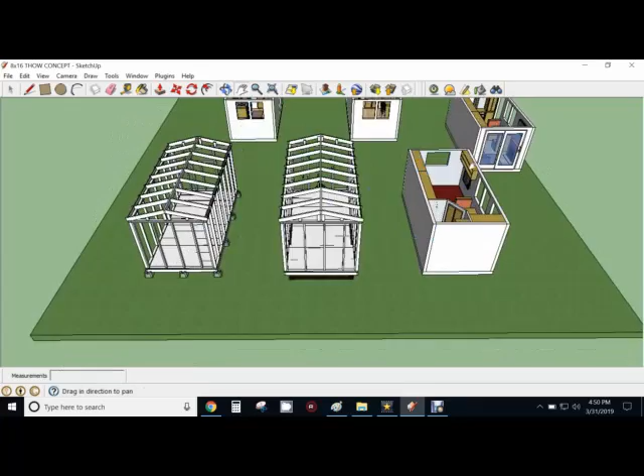This is part 2 of my series on how to build an 8x16 tiny house on wheels or freestanding tiny house. And if you watched the first lesson, which I highly recommend, what you did is you got to see all the different ways that an 8x16 can be used. And I showed you these 4 different floor plans. And you can choose from any one of those 4 plans or come up with your own.

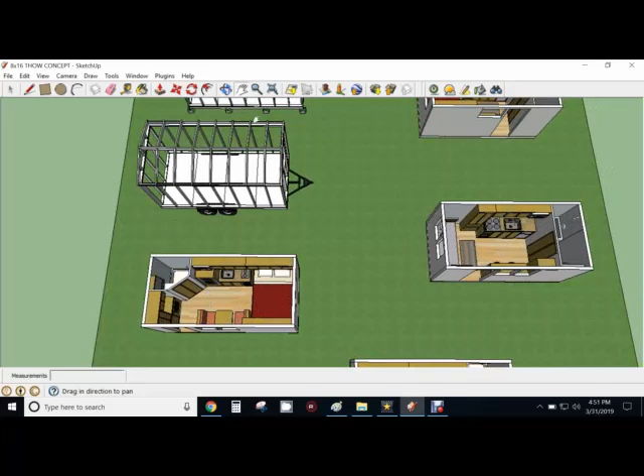All of those units are completely modifiable. Just by clicking on them, you can select and move and erase and do whatever you want. Move windows, move doors, move components in any one of those 4 designs, or come up with your own design if you want. Any of those 4 floor plans can work just fine in this 8x16 tiny house on wheels or freestanding house.

And what I'm going to show you now is I'm just going to go through the basics of framing a structure. That way, if you understand how a structure is framed and constructed, then it makes it a lot easier for you to understand how they're built. And this is probably the simplest house I can think of that you could build, because it's all just straight cuts. If you can draw a straight line and you can cut a straight line, you can build this house.

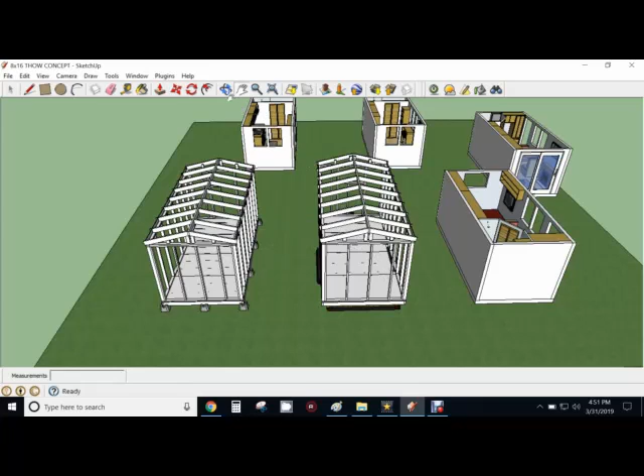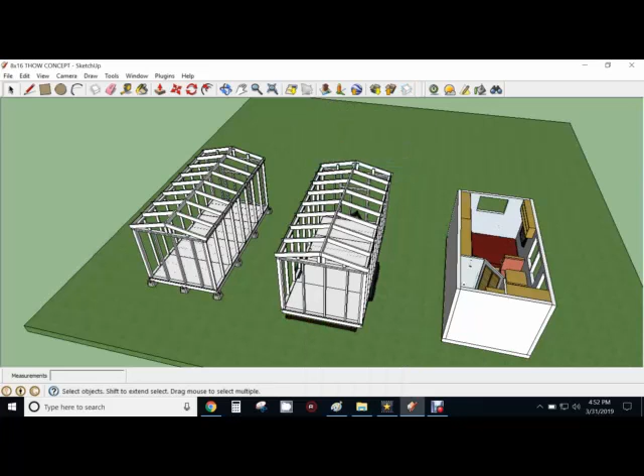So I'm just going to erase these units here because they're kind of distracting. So we'll just get them out of the way. And got some things over here in the way. And I'm just going to erase these so that we have a little easier view of the structure that I'm working on. Okay, so now I've got those erased.

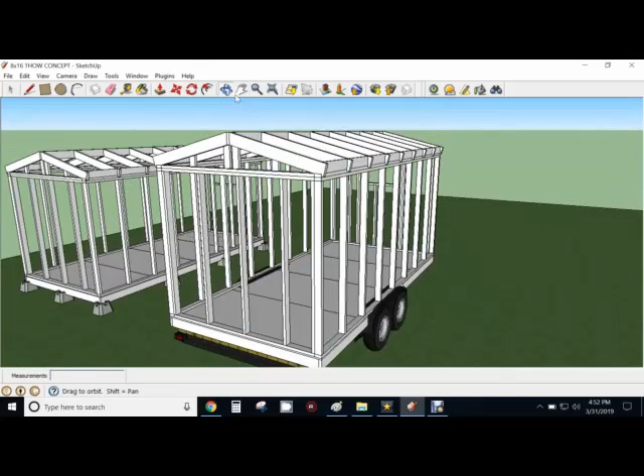Now, what I've got here is an 8x16, and I show this is either freestanding or built on a trailer. Now, the trailer that I'm using is a 7x16, what they generally refer to as a car hauler. And you can get these, Big Tex and a lot of different businesses make these 8x16 or 7x16 trailers. The trailer is 7x16, the house is 8x16. And this is a dual wheel trailer. Generally, they can handle up to about 5,000 pounds axle weight, which is enough for a house this size. It will handle that much weight easy.

And these trailers you can pick them up new for right around $3,500. However, I see them come on eBay and Craigslist all the time for about $2,500 for a good used one. So you might want to shop there before you go pick you up a new one.

Now, I show this is an 8x16, 2x6 floor framing, 2x4 wall framing, 2x6 roof framing. This gives you good insulation in your roof, which is where you lose most of your heat. Would give you R13 insulation if you use batt insulation in the walls, and R19 insulation in the roof. Whether you insulate the floor is up to you. It's not necessary for most houses or most climates, but if you want to insulate it, you can.

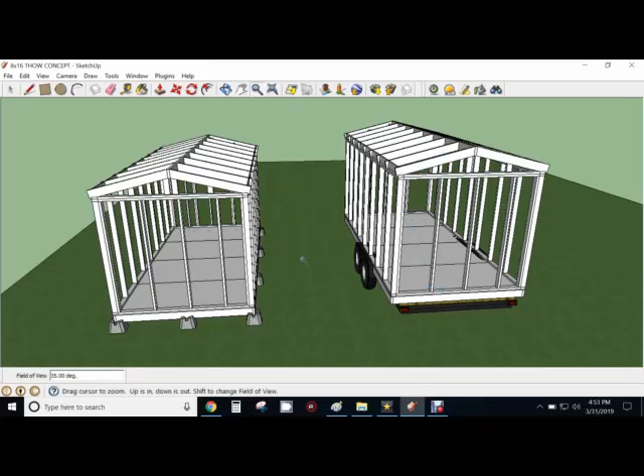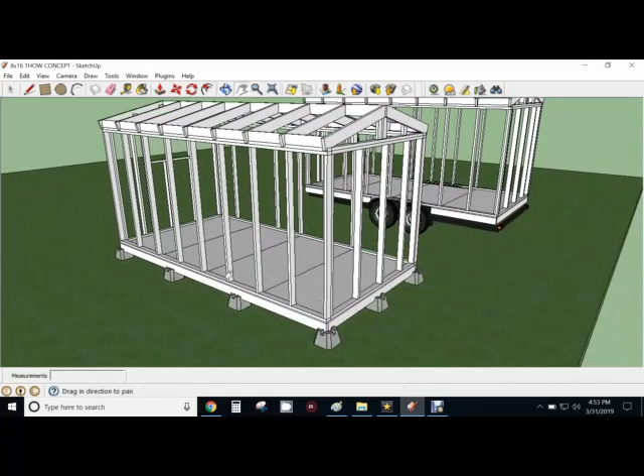Now, I also show this on deck block, which is the same way that I built my cabin. My cabin sits on these deck blocks, and you can pick these up at any home supply store that sells building materials. They run you about $7 a deck block, and you would need 3 rows. I will show this down here. You would need 3 rows of 4 blocks, so you'd need, what's that, 12 blocks, right? So you'd need 12 blocks under your foundation.

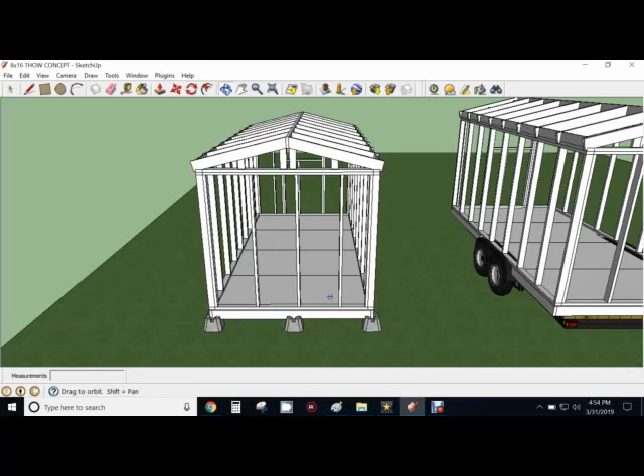And the only thing you need to know really about building this on a freestanding foundation is that the ground needs to be level and clear, so that you don't have anything that's going to grow up underneath the house, and the blocks need to be leveled and on firm ground. You don't want any place where it's going to be flooded out, or you don't want it on sand or something like that on soft soil. The ground needs to be firm, and if you do that, these deck blocks are designed to hold a lot of weight. They will hold a structure this size easy.

Now, to get to the basics, first I'm going to erase or hide some of this stuff so I can show you what we did here. The only difference in the House on Wheels version and the freestanding version is the floor framing. So I'm just going to show you that here.

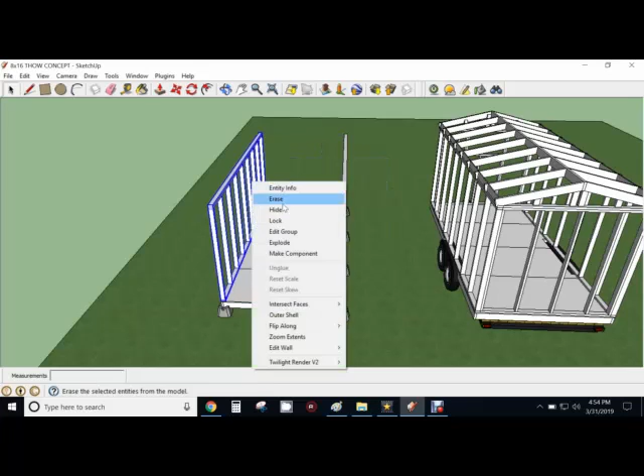Okay, now you can see this as it's set on the deck blocks, and I've just got it set on 12 deck blocks, a row in the middle and a row on 2 sides there. The floor framing on the freestanding structure I've got shown is on 16-inch centers. Okay, this is 2x6 lumber on 16-inch centers. That gives you a good solid floor frame.

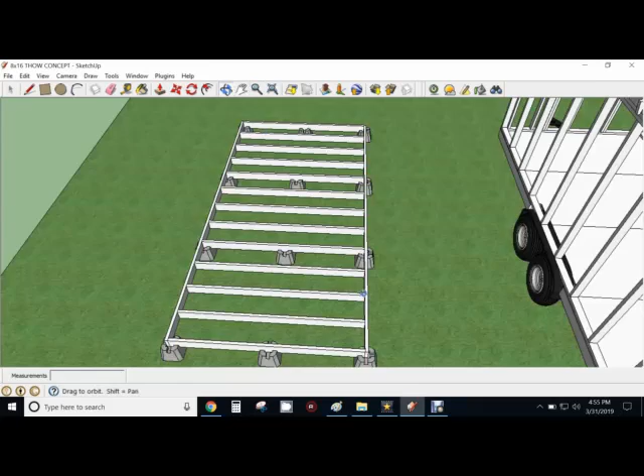All right, now the difference in that and this one over here I'll show you, which I'm going to have to back up here. Excuse me for a second while I just hide these.

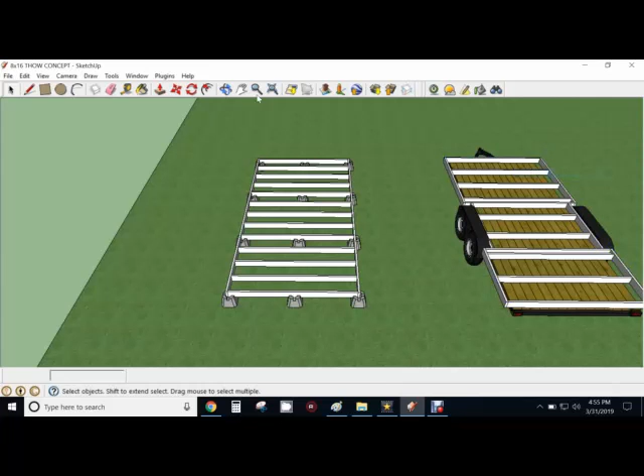Okay, now you can see that trailer, and you can see the difference is, it's still 2x6 lumber, but instead of going with 16-inch centers, I went with 2-foot centers. Because you have a framing structure underneath this that goes all the way around underneath the edges, you don't need as much support as you do with the blocks. However, if you want to go with 16-inch centers, you still can.

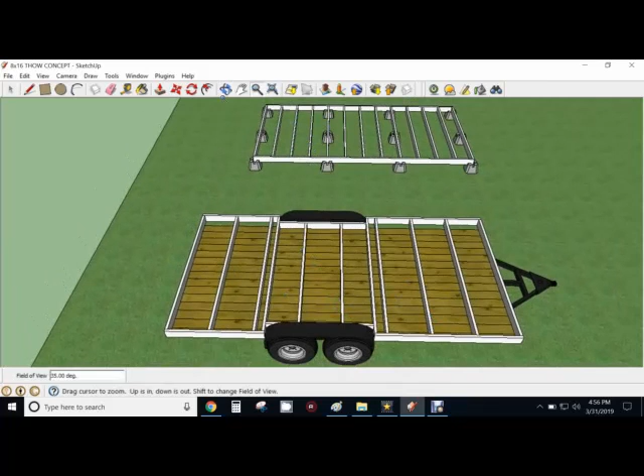The only difference in this house is that you see these indents for the wheel wells. You have to build around the wheel wells. And every trailer is a little bit different in where they situate their wheels. So I can't tell you what the exact dimensions would be for you to build on your trailer because every trailer is a little bit different. But you can see what I've done here is I've just built in around these wheel wells. And your flooring will go inside that.

And then you would have a short box that just goes up and over your fenders, and those would generally be hidden underneath the furniture. You would hide these wheel wells underneath your kitchen cabinets and stuff like that so that they don't stick out in the middle of the room. So you won't even notice that they're there on the inside because they'll be hid underneath a counter or a cabinet. And you can do these on 16-inch centers.

I show this on 2-foot centers because that reduces some of the weight. On a trailer, we're trying to keep the weight down as much as possible. On the freestanding, it's not an issue. But on the trailer, weight is a big thing.

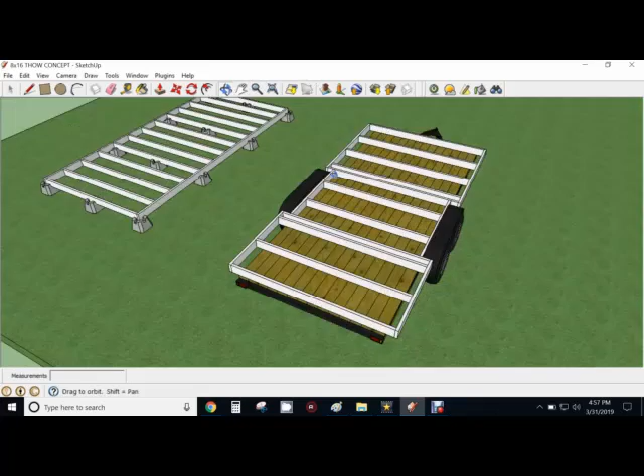Now, I show this on a trailer that already has the wood slats built in. You don't have to have the wood slats if you just have the steel frame. It'll still work. The wood slats just come on them, so why remove them, because they give you more stability on your trailer.

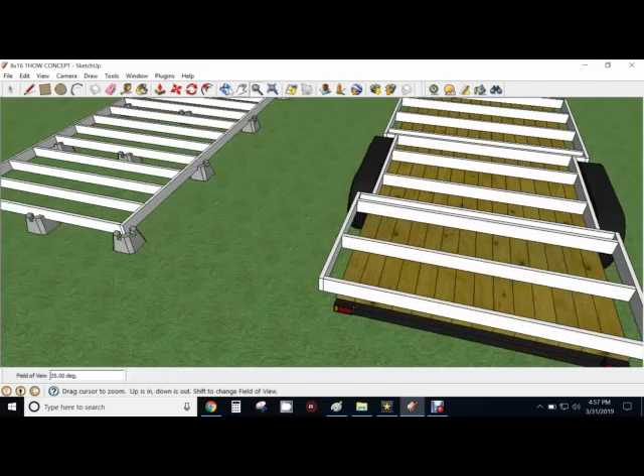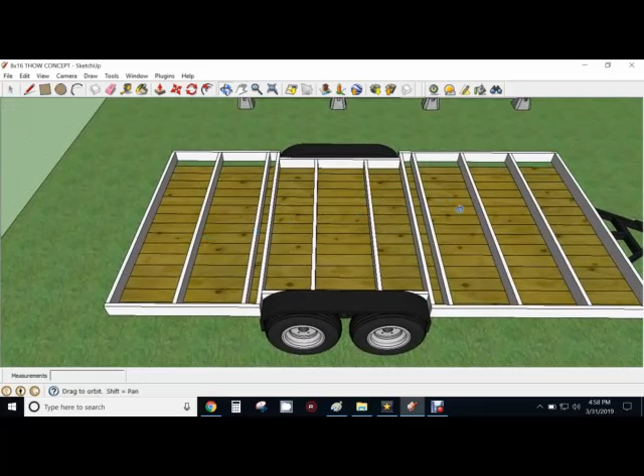And generally, the way these are attached is they usually use lag bolts going through the frame of the trailer and up into the wood, and then they also use steel strapping, and they'll bolt the steel strapping down in several places along this to hold the frame and the house to the structure. If you're not sure how to do that, you can go online or go on YouTube. There's probably half a dozen videos or sources that will show you how to attach your floor framing to your trailer.

Okay, so that's the only difference. Everything else in the way you build these structures is identical. The floor framing is the only thing that is different in these two structures. So now I'm going to unhide these again. Okay, and let's get to the flooring here.

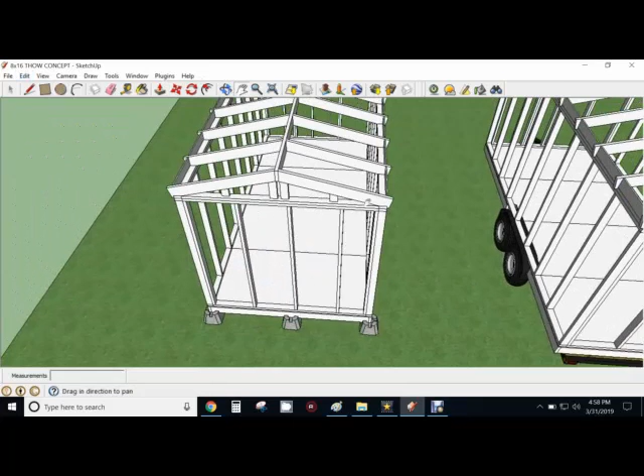Now, I'm going to recommend some materials, but if you choose to use something else, that's just fine as long as it's good, sturdy material. And I always recommend getting recycled materials whenever possible. So this is a good opportunity for you. If you're a scrounger, you can probably find some recycled materials. Okay, so I'm just going to show us now.

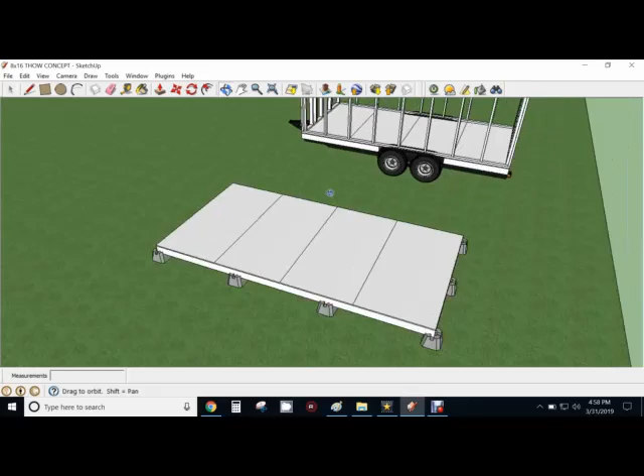For the flooring panels, I recommend OSB 3/4 inch 4x8 sheets, tongue and groove. That gives you a real solid flooring that isn't going to sag, okay? 3/4 inch, good solid flooring. These come in 4x8 sheets, so since this is an 8x16 foot trailer, you need 4 sheets, and you won't even have to cut them.

And when you put them down there, make sure that you square your corners and level everything, okay? If you square all your corners to your first panel, then the rest of the frame will be square. So that's just the easy way to do it. Put down your first panel, screw it in place, and square your corners. And what square means is it's aligned with all of the edges and the corners.

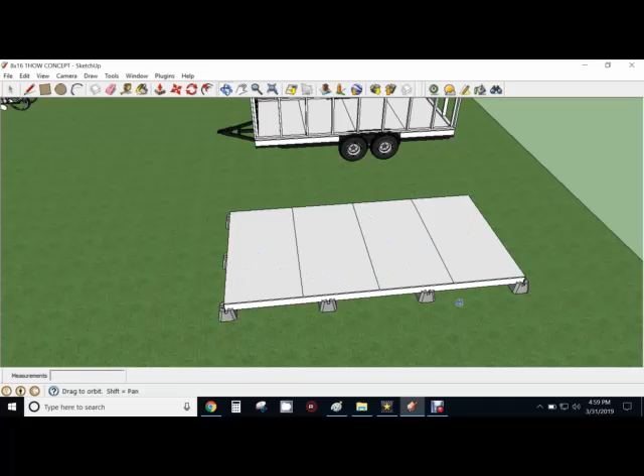If you do that, and then level the entire floor with the ground after it's done, then you'll have a good solid structure. So there's your floor panels. Now we're going to go to the wall panels.

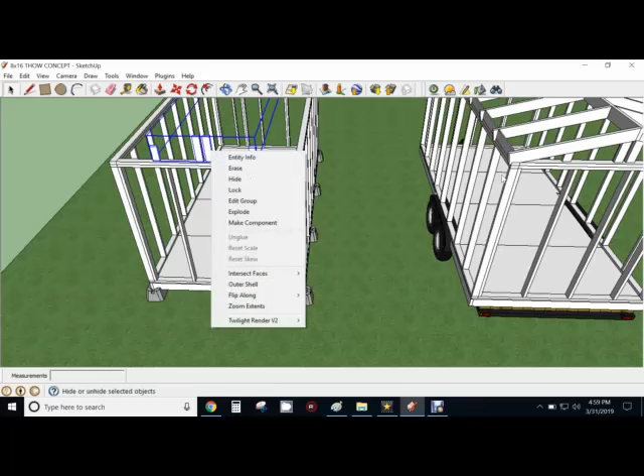And here what I'm doing is I've just got some 2x4, and I built these with 7-foot walls. If you want to go with 8-foot walls, you can go with 8-foot walls. I went with 7-foot walls because on a trailer we're trying to reduce the weight, and that also reduces the drag, and I'll explain that here in a minute. We're going to reduce the weight and the drag on a trailer. And the way you can do that is by going with a 7-foot wall instead of an 8-foot wall.

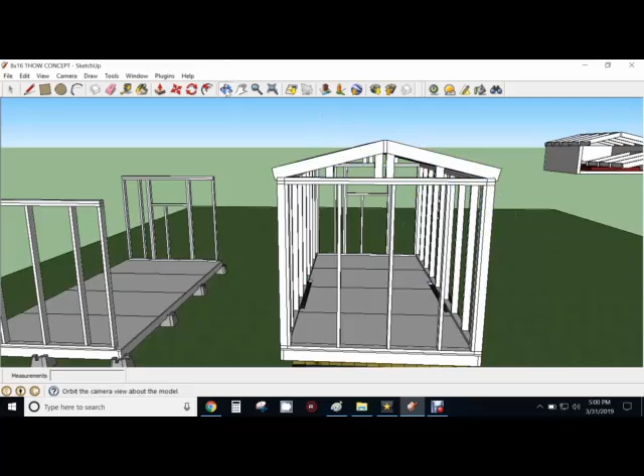In the peak up here, because this does not have a traditional ceiling going across it, in the peak it's over 8 foot. Okay, so you've still got inside room, headroom is generally 8 foot. Nobody stands right next to the wall. So 7-foot sidewalls, you're reducing a lot of weight by cutting it down to 7 feet, and you're reducing drag.

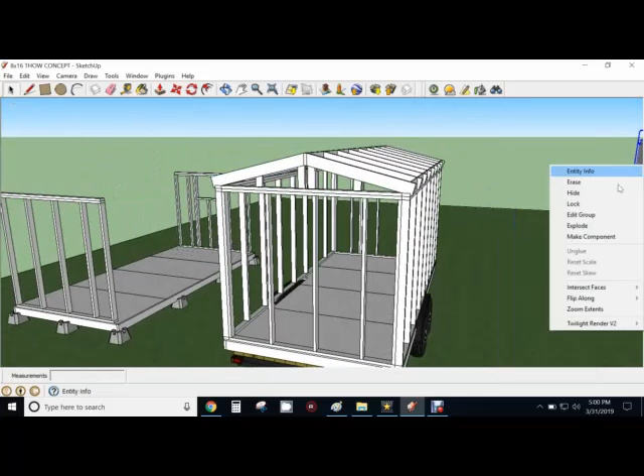If you go up 8 feet, you put this up higher, that means it's going to be top heavy. It's going to be more likely to sway back and forth when you're driving down the road. Dropping it down just that foot makes it less wind resistant and reduces it from being top heavy. Okay? And it reduces a lot of the weight. So you're trying to reduce the weight. I've still got some stuff hanging out here. Let's get rid of this here. Okay. So that's the reason I went with 7-foot walls. If you want to go for it with an 8-foot wall, that's fine.

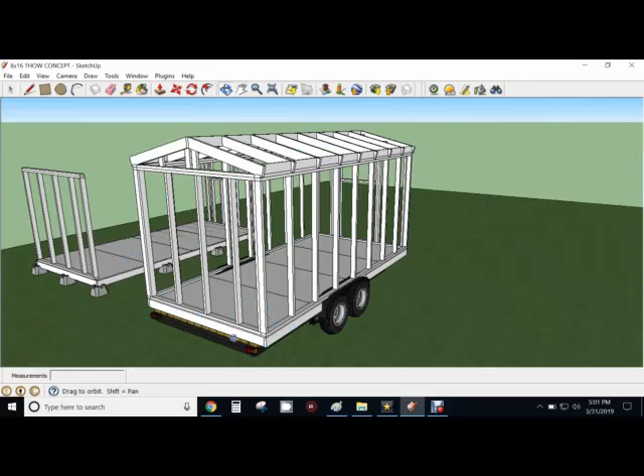What you need to remember on sizes for a trailer is it needs to be less than 13.5 feet high. That's from the ground. 13.5 feet tall, and it needs to be less than 8.5 feet wide. So you want to go 13.5 feet, no more, if you're building up, and 8.5 feet wide is as wide as you can go to be legal on the road. If you're never going to put it on the road, build any damn size you want. But if you're going to put it on the road, then it's got to be under those sizes.

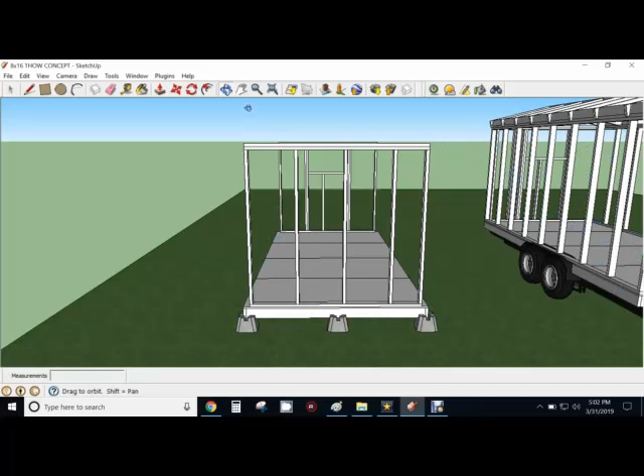Now, on the sidewalls, okay, 2x4 structure, and I put these on 2-foot centers. 2-foot centers, that reduces the amount of wood, so it saves a lot on the cost. If you want to go 16-inch on centers, that's just fine. I don't care. But on the Tiny House on Wheels, I recommend 2-foot centers because that reduces a lot of weight. You're taking quite a few 2x4s out of that situation that would have to be added weight to your trailer.

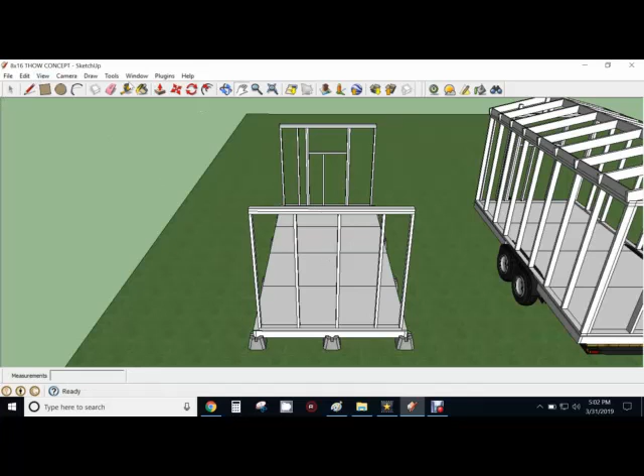So, I show an end wall, okay, with a double header on top of it, single lower floor header, or lower seam board, and these are just screwed or nailed to the floor directly through the floor panels and into the floor framing, okay. Same thing on both walls. Now I show a window here, but your window doesn't have to go there. You can put your window any place you want. Now that's the end walls. We'll unhide this.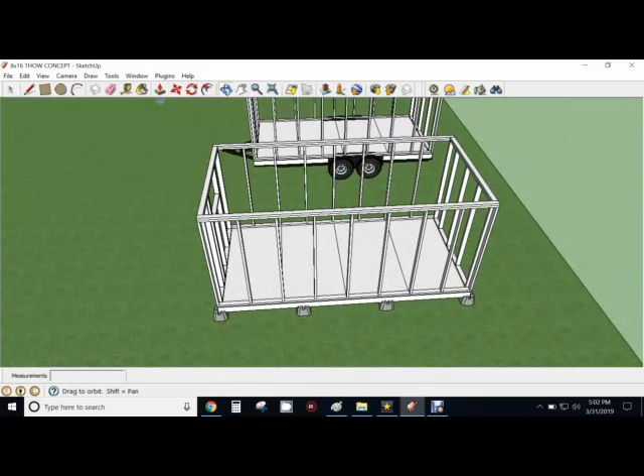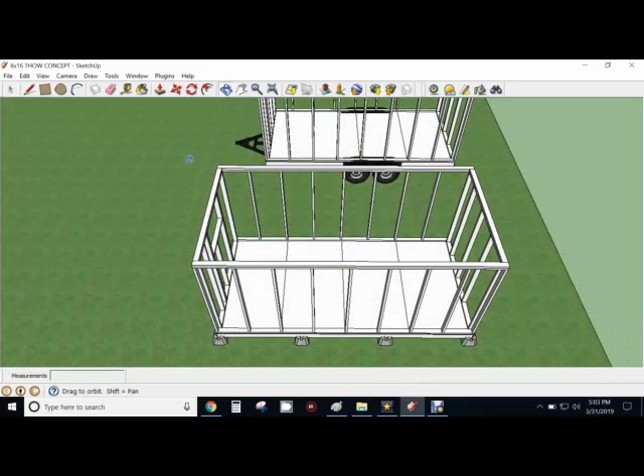Now, here's your side walls. Same thing, 2x4 walls. All right. And on 2-foot centers with a double header and single sill plate. And those are your walls, okay? And I would do California corners on these, but you can do them any way you want. California corners adds one extra 2x4 in the corners just so that you have something to attach your inner wall surfaces to. And that's about it for wall framing, okay?

Now, where you put your doors and windows, that's entirely up to you. Now, if you're doing it on a trailer, like I show this one over here, you could choose from your floor plan that you selected where you want to put your door. So say you want to put your door over here. All you need to do when you have this SketchUp open is click on the wall. And then right click and click where it says edit wall. And then it says add window, add door.

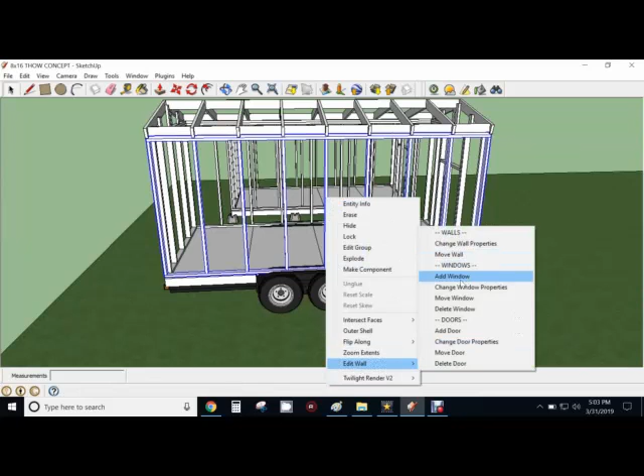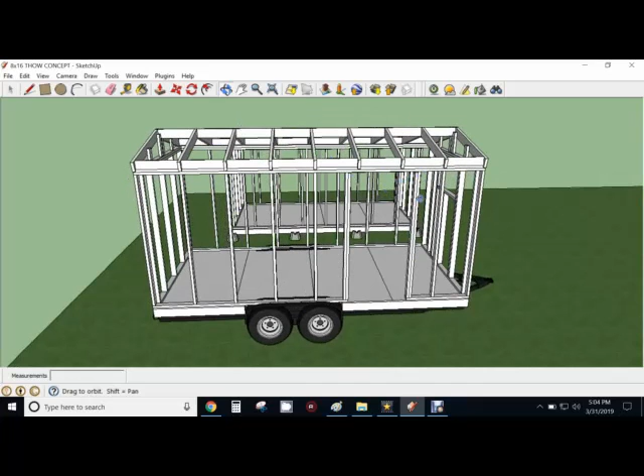Let's go add door right there. And I want a 2x4 header over my door, and I want the door to be 3 foot wide. Yeah, that sounds okay. And then you're just going to select where you want your door. Boom. There, put your door in, okay? Now you can see where you got your door. And it already frames it, puts it exactly where you want it. On a 7-foot wall, it puts it right up next to the header there. So there is your 3-foot door wherever you want it.

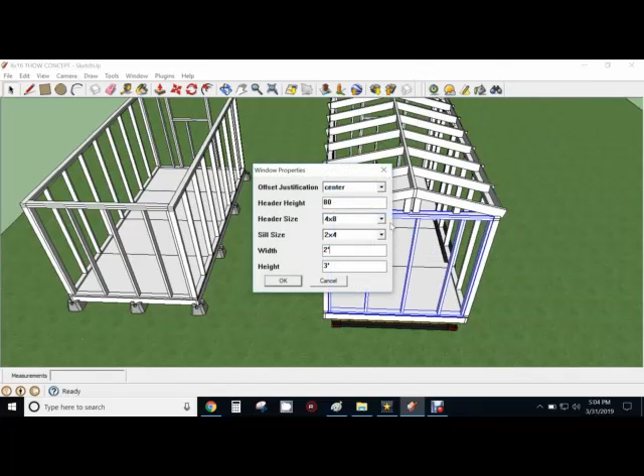Same thing for windows. Say you want a window on this end over here. All you need to do is right click on it, click on edit wall, click add window, okay, and I want a 2x3 window, 2-foot by 3-foot window with a 2x4 header, since I'm working with 2x4 walls, okay, and then I can just take this and I can just center it right there, boom, it puts in my window, okay. That easy. That's how easy it is to modify and change these.

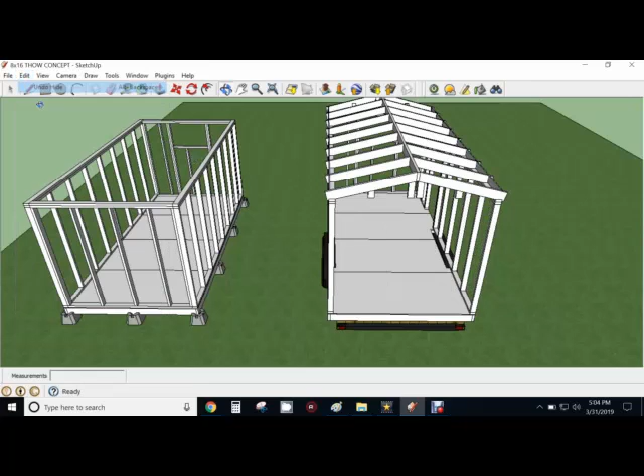If you don't like something, you can go back and change it out. You don't like that? Great. Just go back up to edit and click undo add window, and then click undo hide. And whoops. Undo hide. There you go. And it just puts the wall back in. Say you didn't like that window? Okay. Just put the wall back the way it was. Put a window somewhere else. All right. So that's an easy way for you to modify where you're going to put your doors and your windows in these units, and you can put them anywhere you want.

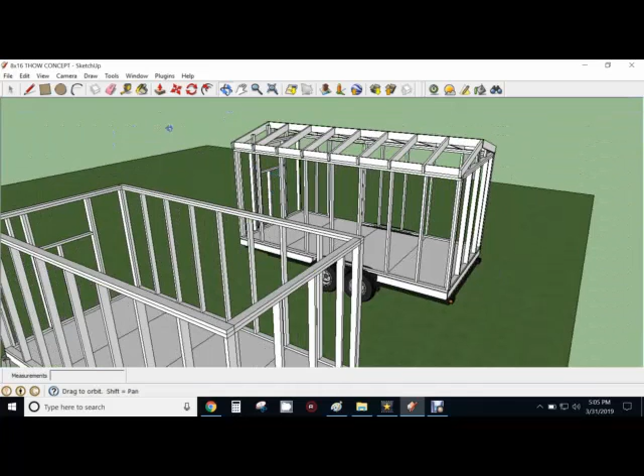Same thing on this unit over here. All you need to do is select where you want it. If I want a door, let's put my door on the end here. Let's put a door and a window on this side here. Just right click, click edit wall, click add door, and I want a 2x4 header, 3-foot door, okay, and let's put the door over here.

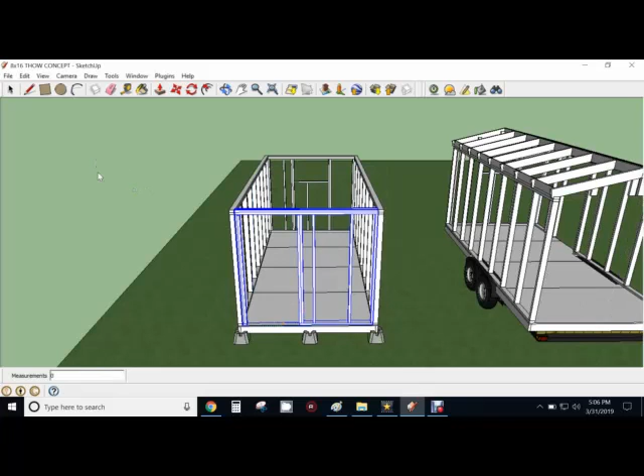I'm going to put the door there, and then I'm going to put a window right in here, okay, right click on it again, edit wall, add window. I'm going to put a 2x3 window in there, and a 2x4 header, okay. Oops, I clicked on the wrong one apparently. Try that again. Edit wall. Add window. There we go. 2 by 3, 2x4. Yeah, okay. And I'm going to put it right there. There it did it. Okay.

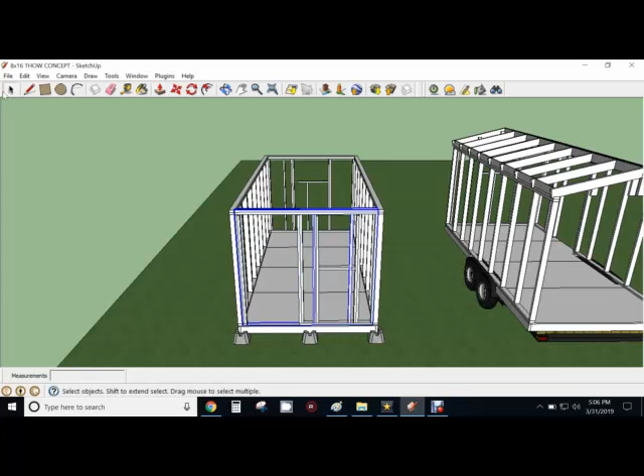Now, sometimes when you put in a window or a door, you have to modify it slightly. So if you want to modify it, double click on it like it's any other component. If I want to take out some 2x4 members or something like that, I can do that. So let's see what we got here. I don't really need an additional 2x4 right here. So I'm going to open this up. Oops, clicked on the wrong one. I'm going to take that 2x4. I'm just going to delete it. Okay. That puts my window where it's supposed to be.

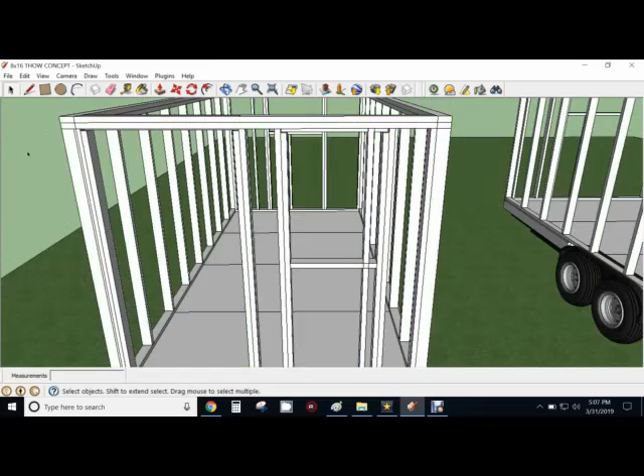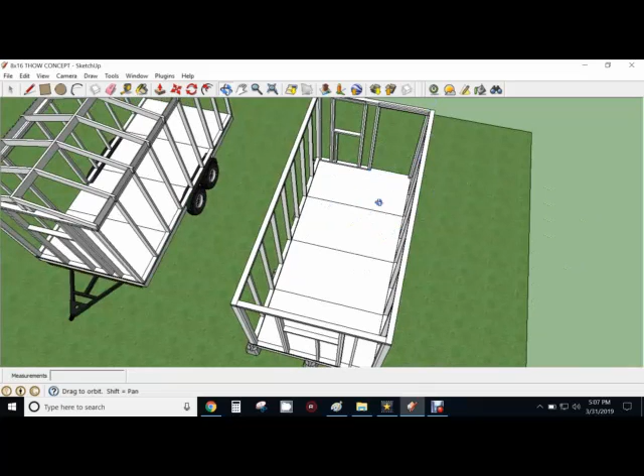Now you can see I've also got a 2x4 here. So we'll just delete that. Okay, now my window looks the way it should. So there I've got a 2x3 window and my door in this end of the house. If I want to modify this so that this is the way I want to enter on this side instead of entering on the side, I can do that, and then I can place all my furniture and everything else in here. So that's how you frame windows and doors, and you can play around with it, decide wherever you want it to be. And let's unhide everything here.

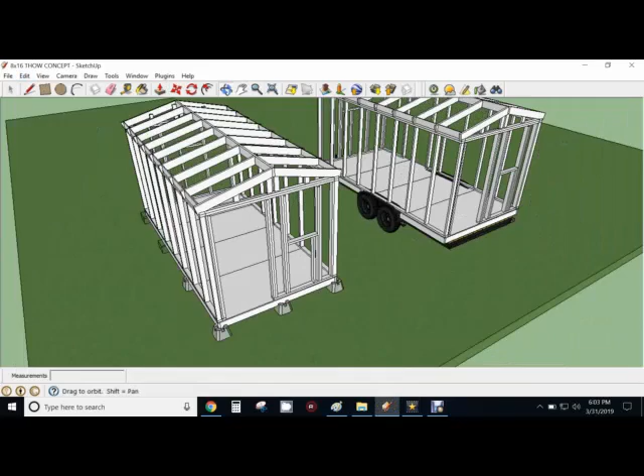Okay, so now I've shown you how to do your floor framing, your wall framing, how to add doors and windows to these units. The only thing left really that I need to show you is just how to design your roof. You can use the roof design that I've showed you here, or if you want a different pitch, you can do a different pitch here. So just to show you, roofs are fairly easy to design.

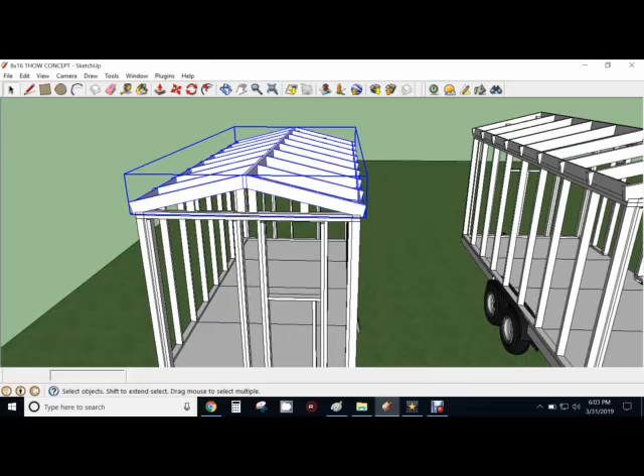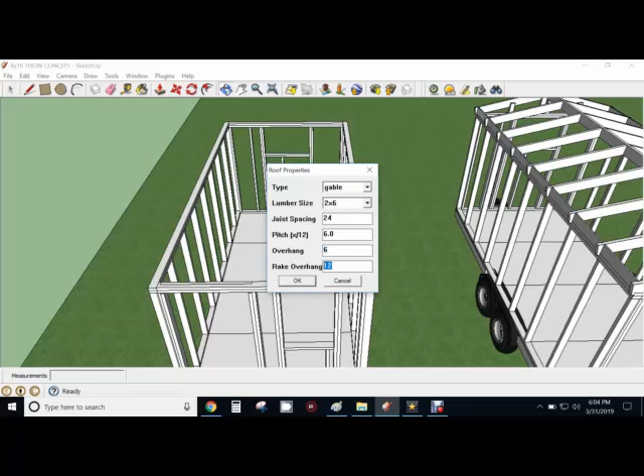What I'm going to do is I'll just erase this roof here, and these boards here I'll just hide. The way you design a roof is in the draw section in the house builder, you'll go to roof tool, and then just select your material. I want 2x6s. We'll go with a 6 pitch. Now remember, on a house on wheels, the end boards have to be under 8'6" for width. On a standalone freestanding house, you can go with any one you want here. So we'll go with a 6-inch overhang and 6-inch rake overhang. And I'll show you what the difference is there.

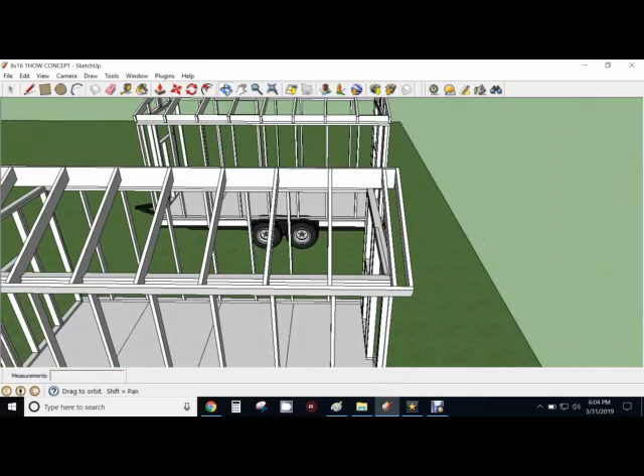Now, there's a 6 pitch. You can see the difference here. With a 6 pitch, you get a little bit more headroom, and your overhang off of the end walls, which I don't do on the house on wheels because you don't want the wind to catch underneath it and rip your roof off. So we go right to the edge with our roof framing for a house on wheels.

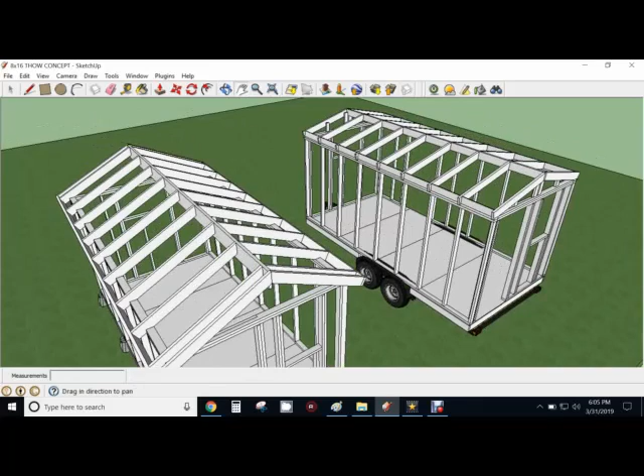You can do a short overhang if you want, but I don't suggest a very big overhang, at least not on that front end, because as you're driving down the road, the wind's going to catch on that front end, and it's going to tend to lift your roof and lift your house right off of your trailer. You could put an overhang on this end, it won't make any difference. So that's a 6 pitch. If you want to change the pitch, then you can adjust your roof and do your end wall plates however you want to do them.

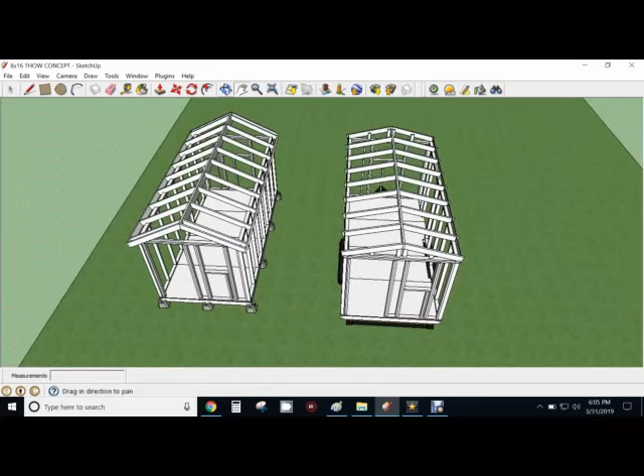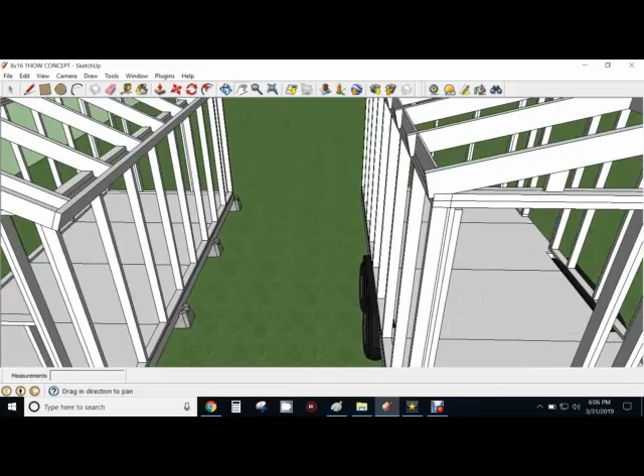Alright folks, I think I've done enough here to show you how to frame and construct one of these. And you've got those 4 basic floor plan models that you can play with any way you want, and that way you can design these, put your doors, windows wherever you want them. You can understand the framing, how the roof is built. You can do any type of detail work you want on these, add all your sidewalls and panels to show what the entire house would look like the way you want it designed. That's why I design these SketchUps like this. I'm not going to do all the work for you, because that takes me a lot of time that I could be spending designing other houses for you.

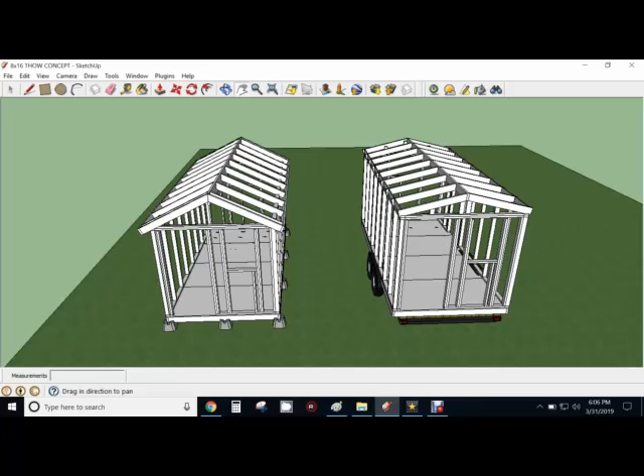And then you can play around with everything. You can modify all the different floor plans. You can modify the framing any way you want to do it. If you want to add a loft, all you got to do is extend these walls up to 10 feet and then build 2 roof sections instead of 1 roof section. You can figure all that stuff out. I think I've given you enough basics for you to understand how they're constructed. And if you want to build one, you'll probably have enough experience just by following along with those 2 lessons that you could probably get started if you have some basic construction skills.